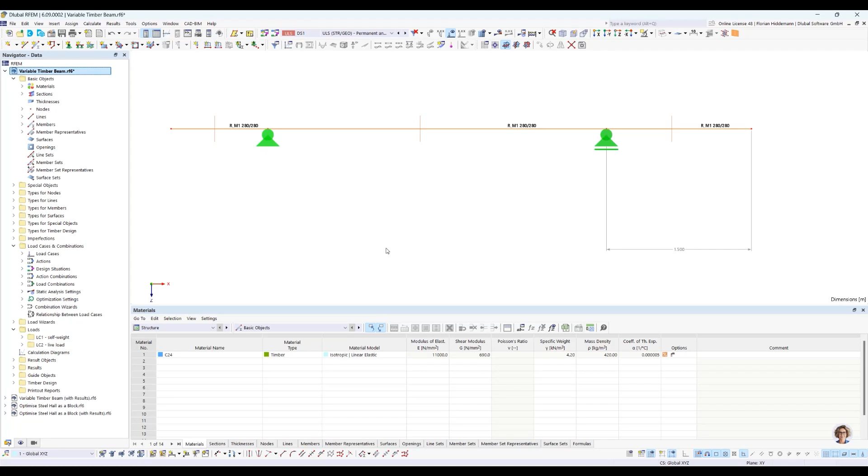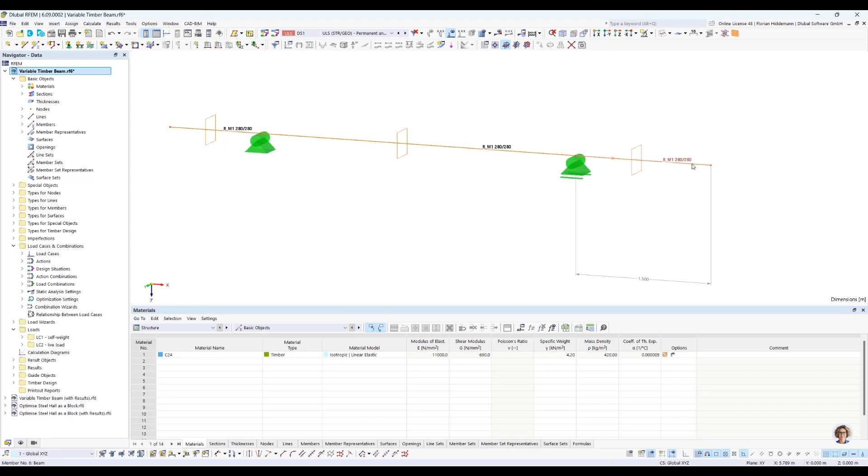And as you can see here, the first model is a variable timber beam. This one has nothing to do with blocks at the moment. It's just for demonstration purposes of the new features I just explained in the PowerPoint. So what do we see here? We have an easy static system. It's a single span member, and at the ends there are some members reaching out on the left and on the right side.

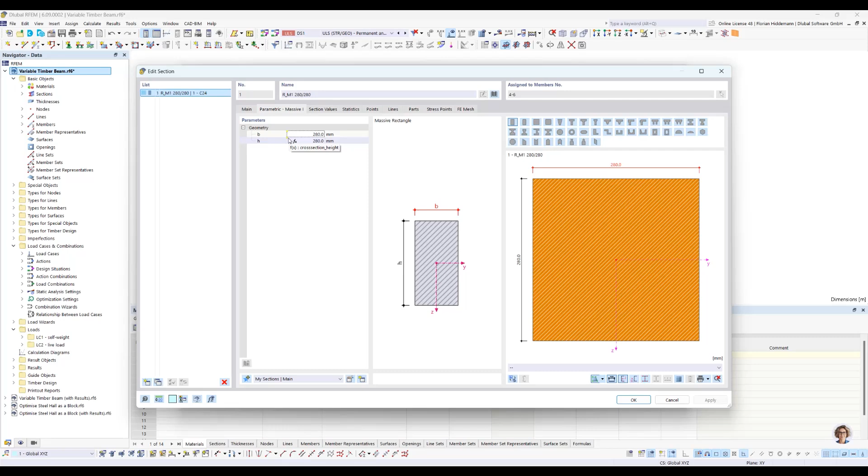It's a rectangular cross-section. And of course, when we are dealing with optimization, there are some global parameters in use. So we start here with a 280 by 280 cross-section with C24 timber material. And as you can see here, the cross-section width is given with a global parameter and the cross-section height also. In addition to that, the distance of the right support is also variable. I can show you now here the overview for the global parameters.

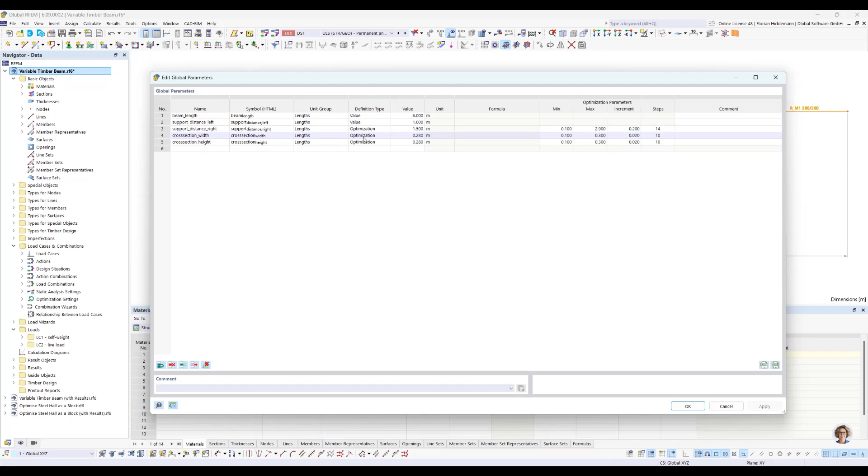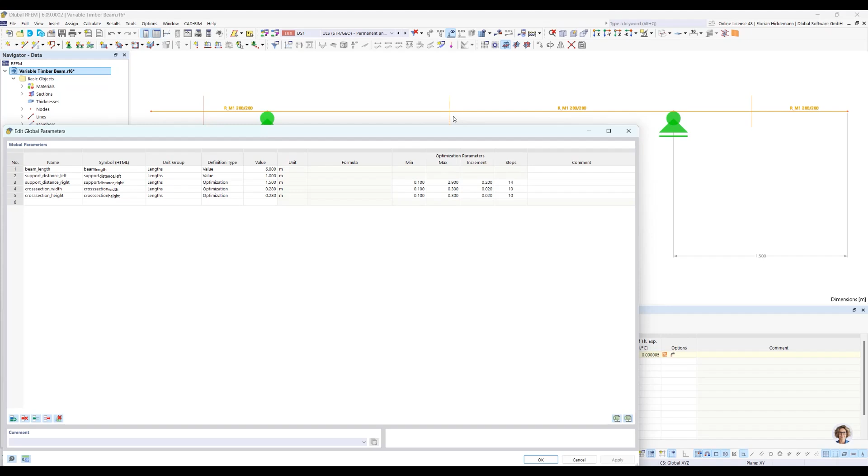The beam length is just a constant, which is easier for me to make the model. And the left support distance here is just a constant. And we would like, in this little example, to find optimal solutions for the right-hand support distance, which is now 1.5 meters, and for the cross-section width and height. This parameter here, the support distance, can be varied from 0.1 meter from the right side up to 2.9 meters, which is nearly in the middle of the beam.

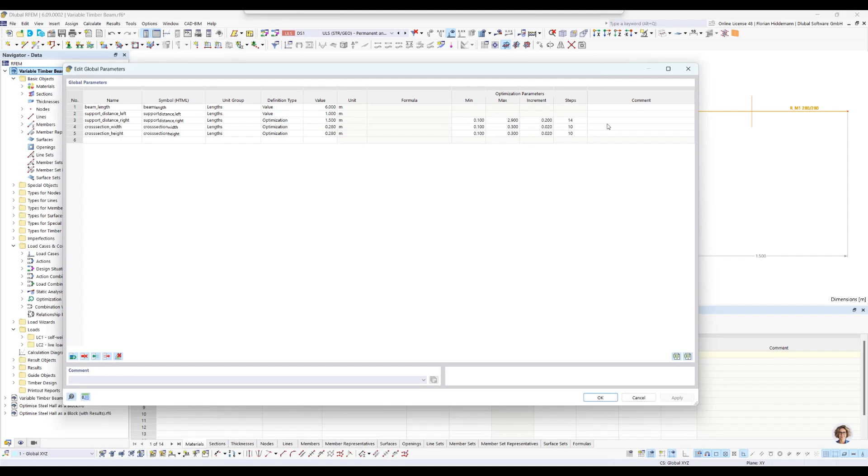The cross-section width and height go from 100 millimeters to 300, in steps of 20 millimeters. So you have 10 steps in between, and this is the variation this cross-section can take into account. So let's have a look at the first feature: recognizing valid mutations in the result list. For this reason, I activated also the Timber Design add-on. As you can see, Timber Design is activated.

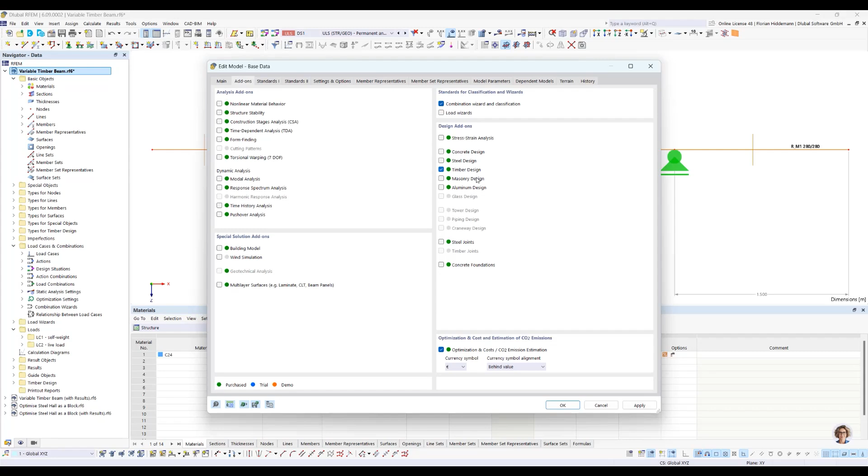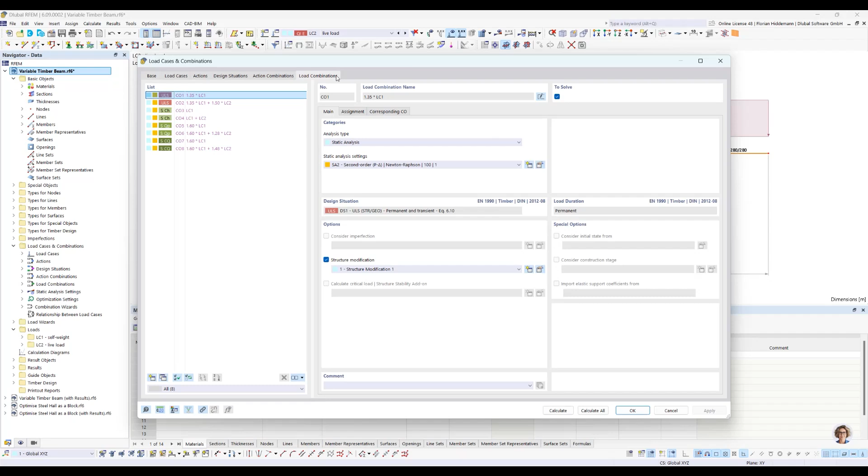And I just made, for demonstration purposes, easy loads. You see load case 1 with some self-weight, and there's another load case with a live load. We use here the German National Annex, of course, and a combination with it. So you can see design actions. It's all standard, which you are maybe used to already, that we do some combinations and design situations for you. So you don't have to worry about all the timber design specialties.

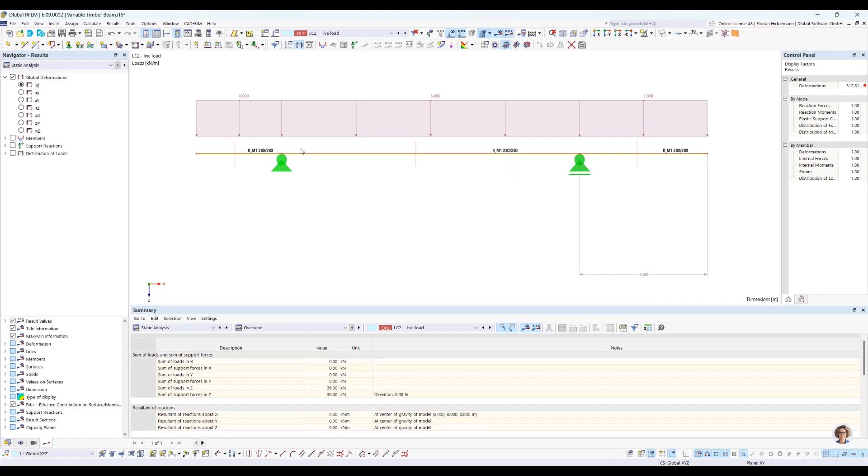So let's calculate the system in the first place to see what we are talking about here. So now it's a standard calculation without optimization. You can see in each run later on, all these calculations are performed for each mutation. And as we can see in the governing results of the design add-on, everything in this configuration looks fine.

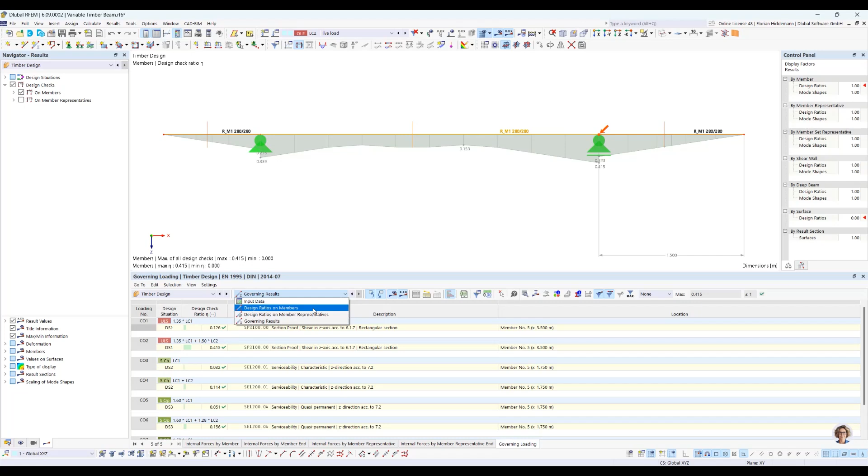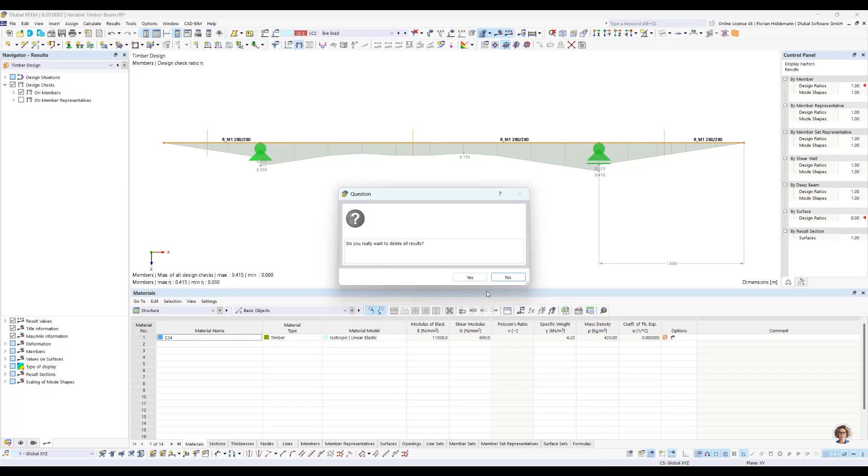But we are here to find out if there is an even better configuration or not, and to play around with our optimization feature to see what is happening there. So let's delete these results and jump into the optimization settings. You can find it here under Calculate if the optimization add-on is activated.

So you can store different optimization settings. It's not necessarily one you have to fiddle around with. You can copy it, modify it, and use them for different purposes. This is quite handy because there are a lot of settings you can do, and so you can remember each different optimization run later on.

So what do we do now in the first place? This feature I show you later on. This is the multi-stage mode, the multi-stage calculation. And even with this very simple system here, all mutations would have a total number of 1,815 optimization mutations. This is a lot if you consider that this is a very easy and simple system here.

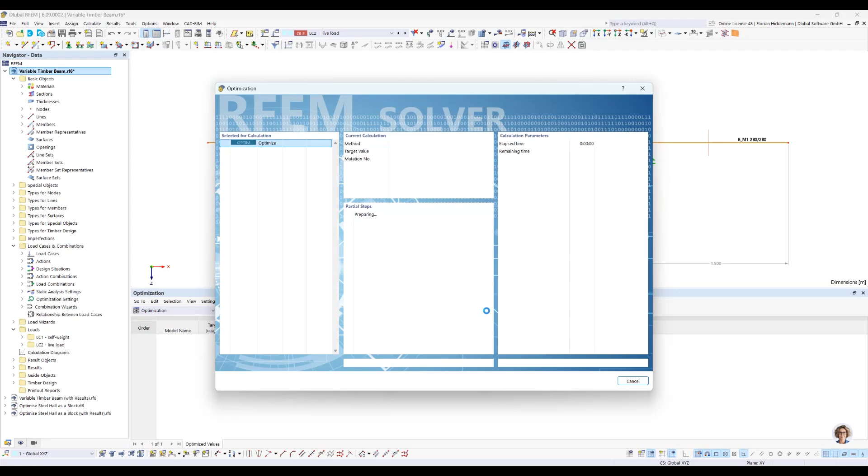So as you can see in the background, the first iterations are calculated. Each one of these mutations is also calculated within the Timber Design add-on. And for this reason, you see model number 1, calculated with these parameters, didn't fulfill the design checks. Model number 2, like in our first example, fulfilled it.

So with this algorithm here, it's just a random mutation. There is no clear strategy for finding the optimal target value. The program at the moment is just giving random examples for these 3 values or parameters and collects all the results. So with this nice feature here, we can see easily which calculation fulfilled design checks and which not.

And now if I cancel this calculation run here, today I will be mean to this model and cancel it anyway. So what you can see here, the calculations performed up to this point are stored. We have now 8 results. And as you can see here, the green check mark means, it's very important to see it again,

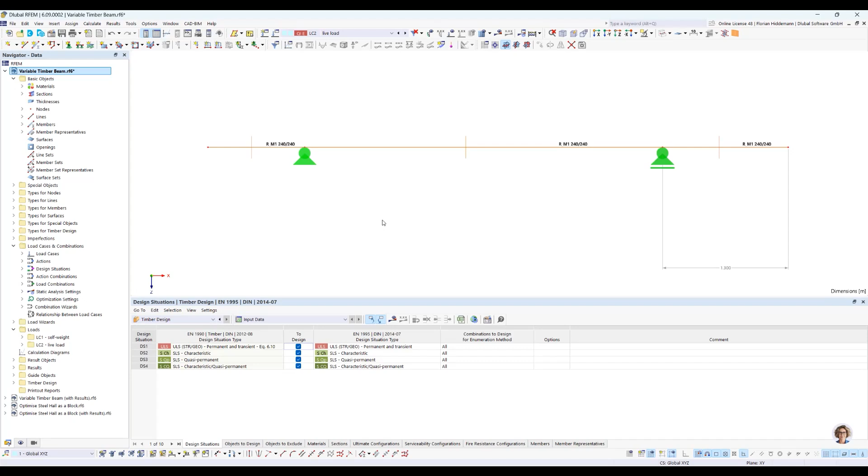this model is now active, and because I canceled the calculation run, the add-on doesn't calculate the last cycle. So if you jump into a new model in the list, you have to calculate the model itself. We store only the results you can see here in the list. Obviously, we don't store every full result which is calculated for each model.

If you have a bigger model, that would be hundreds or thousands of results. But we collect the target value and everything you need to display this result table here. From this point, you can then regenerate your model because the add-on varies the parameters as they are stored here, the way the model mutation shows it.

So for this model number 7, I calculated it now, and here's a green check mark. And as you can see, this means that every design verification here, design check, is fulfilled. So let's see model number 1, for example. I change it here, perform a calculation to see what was going on, why there is a red exclamation mark.

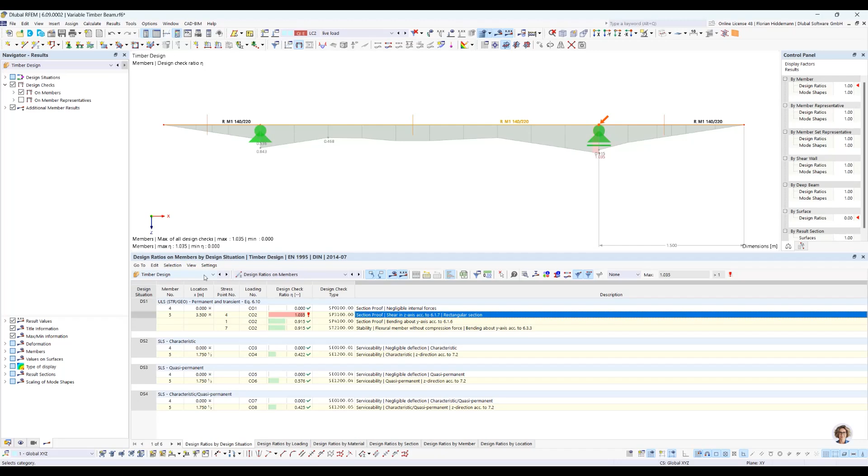And as you can see, close, but it counts. The section proof here at this point on the left side is not fulfilled. So this is the way this list is working with these indicators here.

The next feature: the results list remains consistent. It's easy to show now because I canceled the first calculation run, and maybe at a later point, for example now, we would like to go for a new optimization run. So all I do now is say, okay, try to optimize it with a particle swarm, calculate 2% of the possible optimizations. As every time, I make the optimization cycle here active. This is kind of a safety feature so that you are really aware you perform an optimization run and don't do it accidentally if you calculate all.

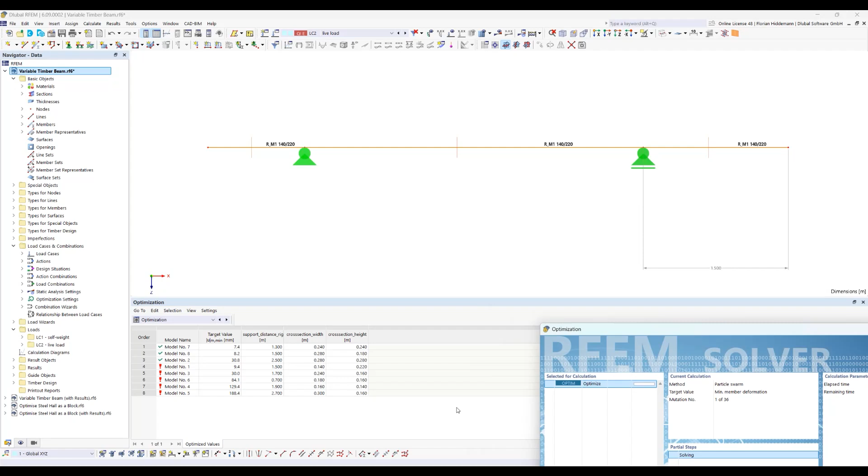Okay, so what will happen next? Let's see. You can see the results list here is stored. There is no new list, and this is a small feature, but very useful if you already spent some time with your model and calculated it, because now the optimization add-on checks each new mutation. Before it calculates it, it looks up the result table and sees if this mutation was already calculated upfront. If this is the case, we jump automatically to the next mutation without calculating it.

And if the model mutation is a new one, which is not stored in the list, the add-on just calculates it and adds it, like you can see here in the background. So as you can see here, now it's more straightforward because the particle swarm is a solving algorithm which tries to vary these parameters with the target value in mind.

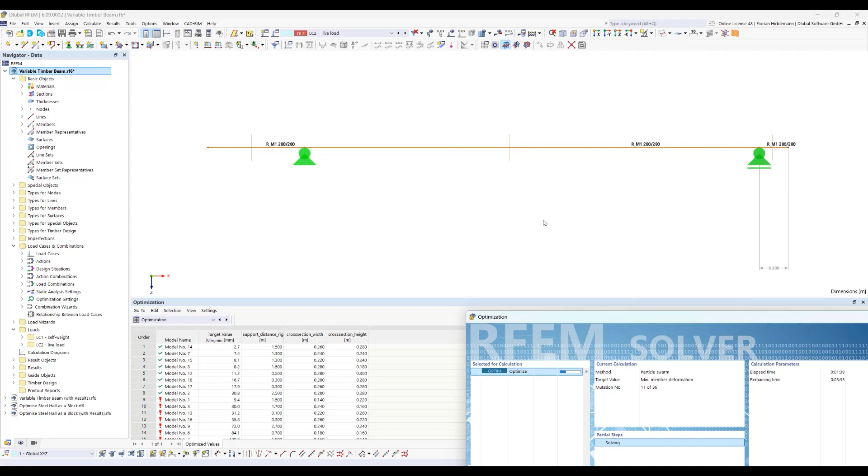And the more you calculate, the more it gets, let's say, a mathematical feeling for which parameter needs to be adjusted in what way to achieve the best target value, which is at the moment the minimum member deflection at every point. So the 2.7 millimeters, let's have a look into the program and cancel it again.

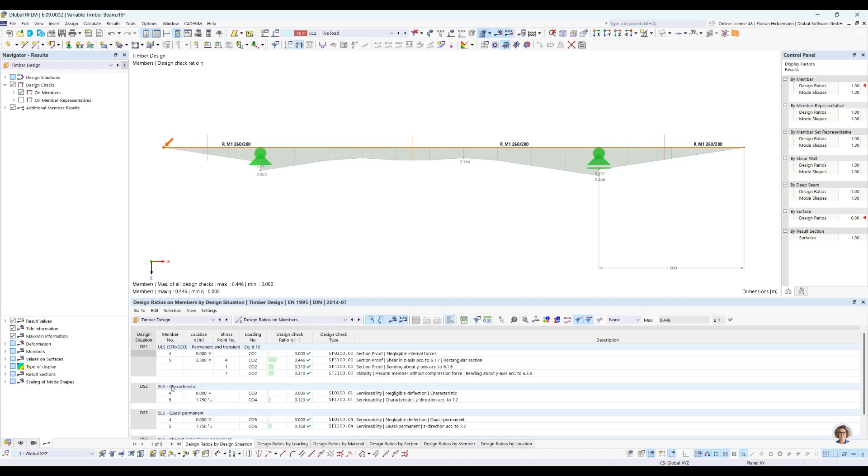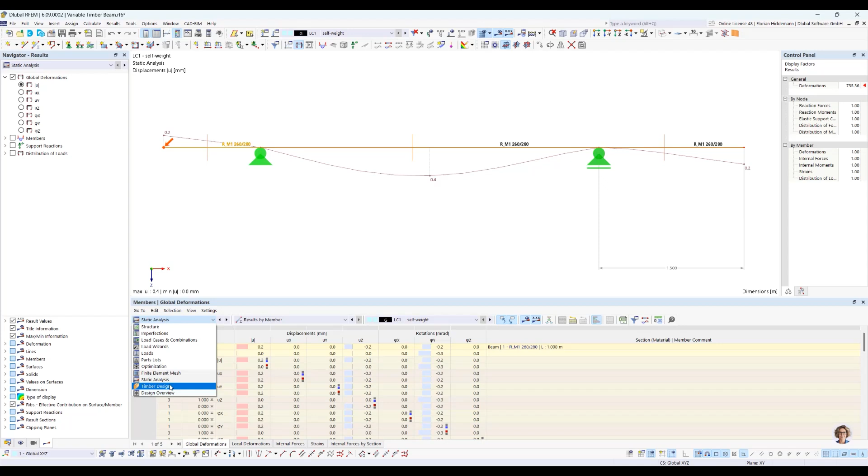Because we aborted the calculation, I need to perform a manual calculation of the system here. So let's see. Every design check is fulfilled. And for the target value, it should be there. I go to another model. Okay, yeah, I found it.

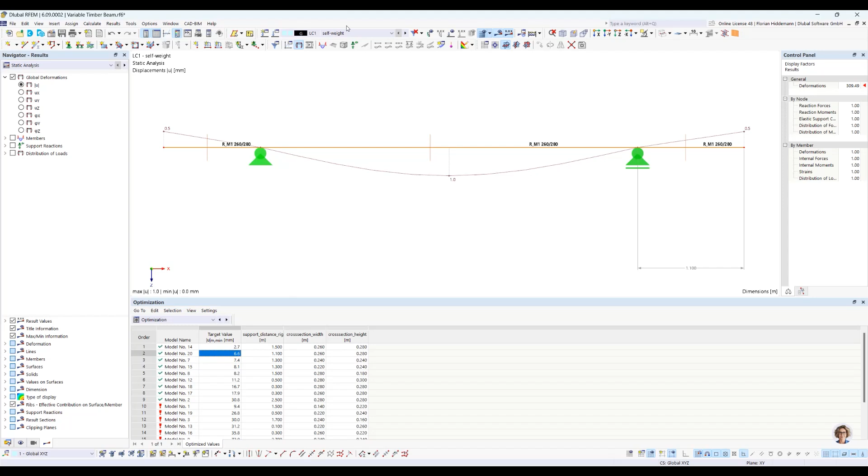Okay, we are looking for 6.6, and this is considered overall design situations. You set it up so if I go to the maximum load here in design situation 1, the ultimate limit state, here you can find it's this part here in the members, 6.6, and this is considered as a target value. It is looking for a global minimum to minimize the maximum member deflection at any given point. I give you some time to let it sink in.

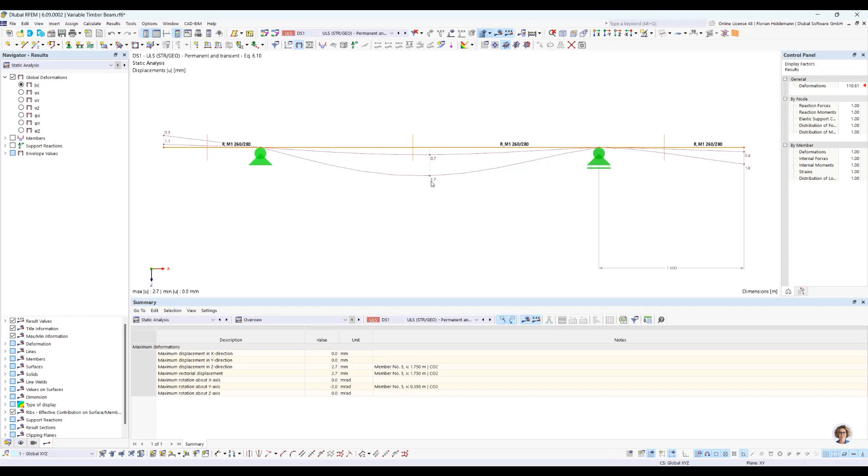And now we are able to find out the 2.7 millimeters. Just to be sure what is going on here in the background. You can see the 2.7 at this point. So this is a small introduction example for working with the list here and the ability that it stores every optimization run. Let's go to the next topic, the sensitivity factors. What is going on with that?

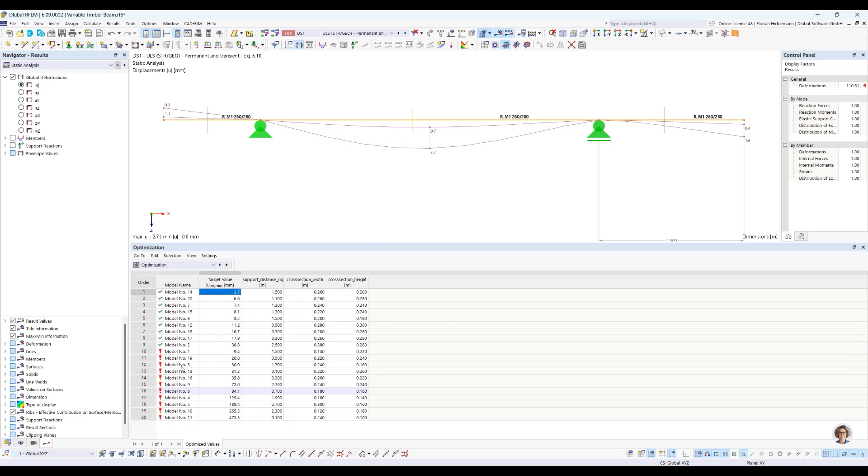In the model now, we have 20 model mutations calculated. And now here in the table of the parameters to optimize, you can see some sensitivity factors. They are now estimated from the model results list here. So we can now perform an analysis of how the target value is influenced by varying different parameters. This estimation gets more accurate the more models you calculate.

And with this small amount of 20 models, you can see the cross-section height has a big impact on the desired member deformation, a much bigger impact than, for example, the cross-section width. If you're familiar with how the stiffness in such a system works, that's absolutely plausible, because the height of a cross-section goes with the third order, and the width goes with the first order into the stiffness of this beam. So it's a very plausible result.

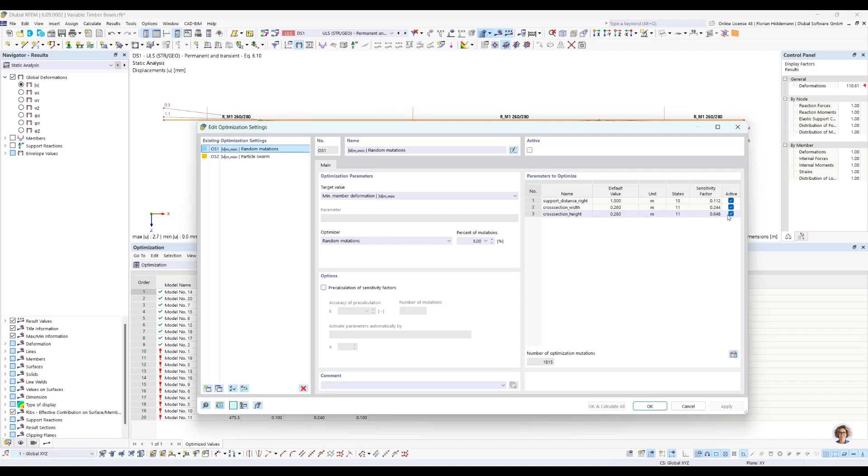And these two parameters here have much more influence than the support distance. That's something you can already see in this little model. Here it's easy to have an overview by yourself, but think of more complex situations where you vary different parameters and you don't have a feeling what would happen if you vary different combinations. This is very nice to reduce the number of optimization mutations, because you can choose, for example, if these ones are so impactful, why should I vary and spend my calculation time with this one?

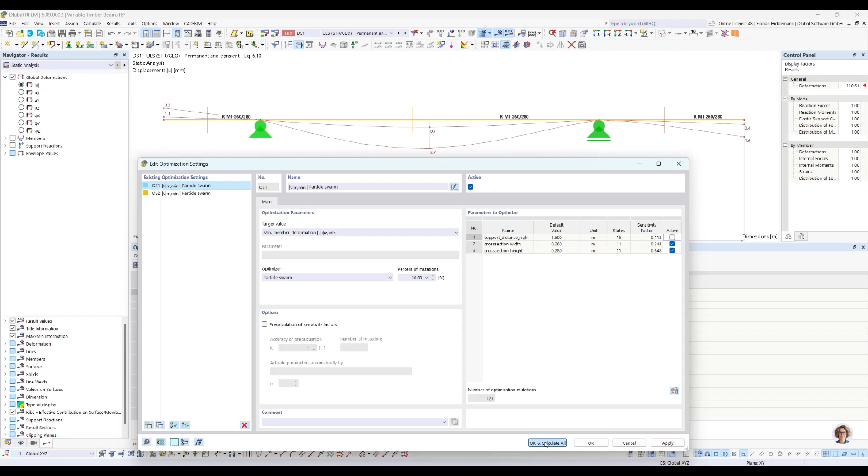And as you can see, it reduces the number of optimization mutations drastically, because now it's 11 by 11 and not by 15 anymore. So here we have 121 mutations. And this makes it much easier for the algorithm to find more potentially better mutations. So now, because I set only these two parameters as active in this dialog, the model is fixing the 1.5 meter support distance and just varying the second and third one.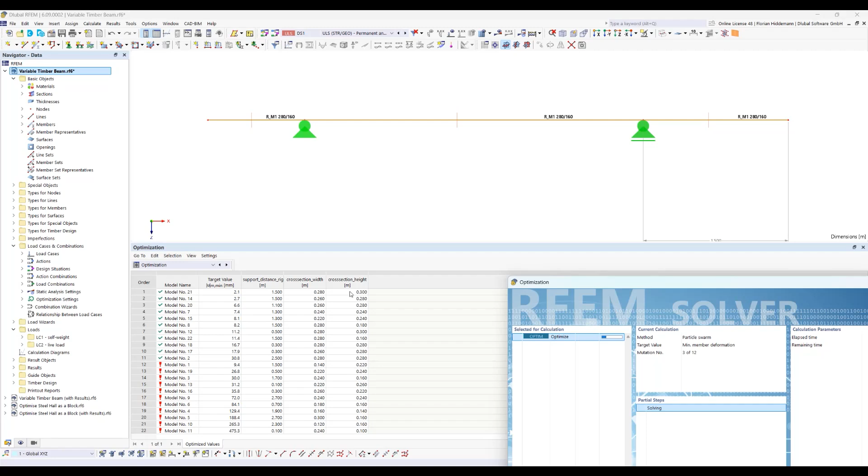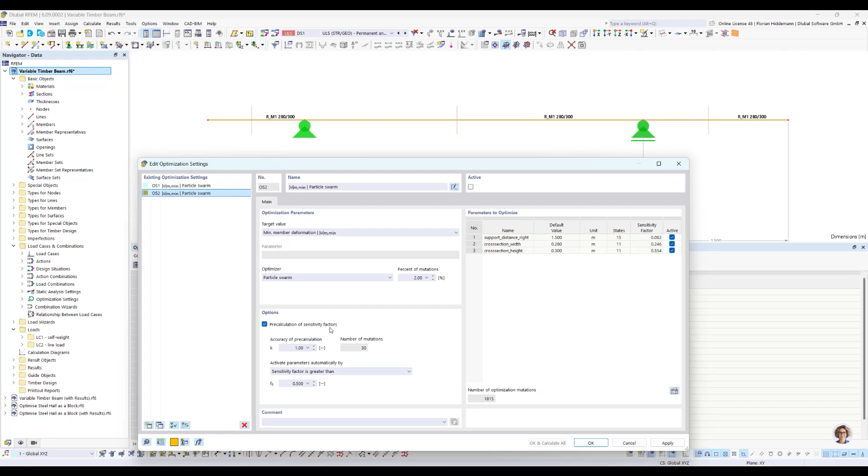Okay, this as a basic introduction, remembering our new features at this stage. I can show you the multi-stage calculation as well, and for this reason I would go back into the settings, choose other optimization settings here, and now we have a look into these options here: the pre-calculation of sensitivity factors. For this reason, I will empty this list by varying the model. This is something you need to do now, because the list is stored.

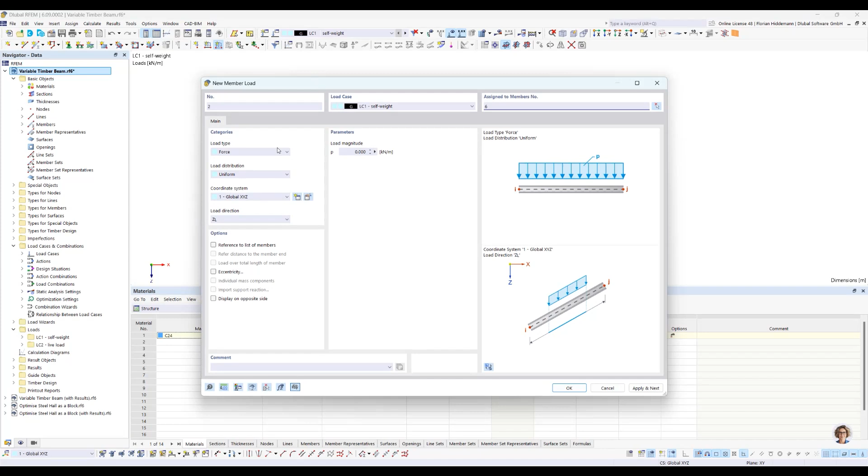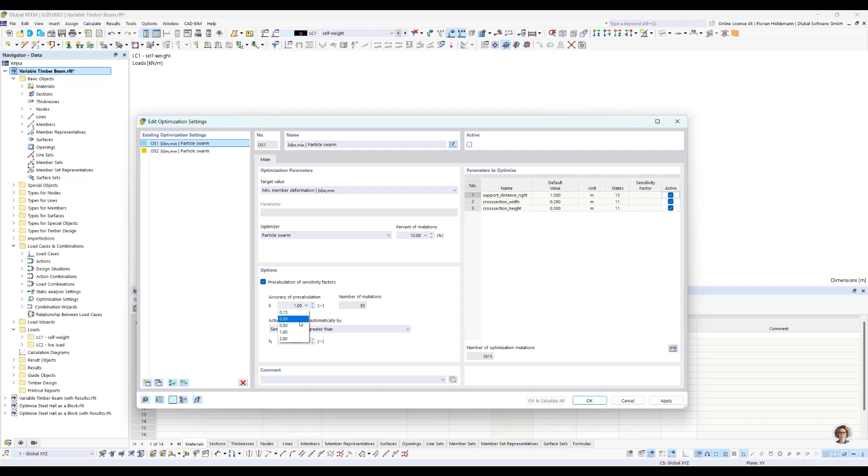What I do now is I delete a load here. And if you change the model in a drastic way like this, all the results are deleted. So be aware that this will have an impact on your optimization results. So now we can start with a clean structure here. And for the next run, I say, please make a pre-calculation of the sensitivity factors. And in this example, let me make only a small guess with, let's say, 5 mutations.

And after that, the program should automatically combine 2 parameters in each following optimization run with the highest sensitivity factors. So it's kind of a bit abstract and complicated, like most of the things with this add-on, but let's see what is behind it.

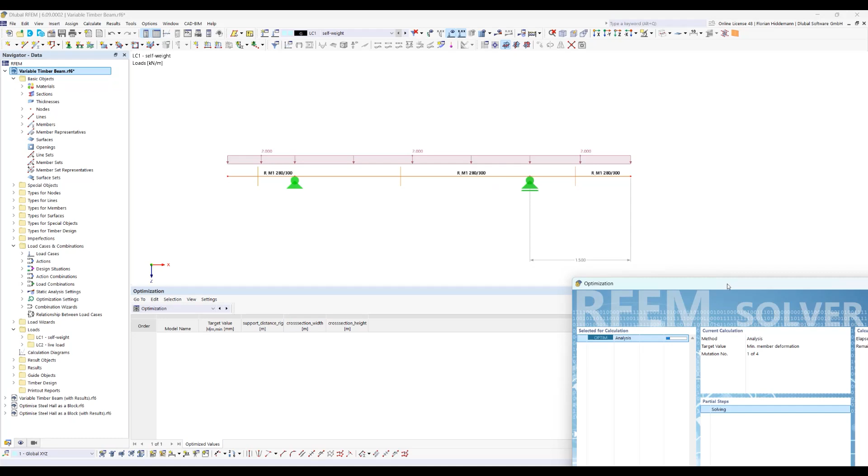So now we have a multi-stage calculation. In the first place, we are doing the analysis. So the model is now varying some parameters with a very small amount of models to guess the sensitivity factors. It's analyzing the results here and the estimated impact of these parameters to those result values. And as said before, the more mutations you calculate, the more accurate is this estimation.

And now it goes to a second step. It uses now the results from the analysis. And here it is now combining the two most influential parameters with a particle swarm that calculates 10% of these possible combinations. And the 10% is now only 16, and it's not 181. I'll show you it afterwards.

And you can see after this optimization run, there is another optimization run waiting. And in the next optimization run, the program goes further and says, okay, I have now combined the most influential with the second influential parameter. And just to check it in another run, I go through and perform a calculation with the second best parameter and with the third best, because you choose to combine two parameters at the same time. And this is the strategy the program is choosing to go through these combinations.

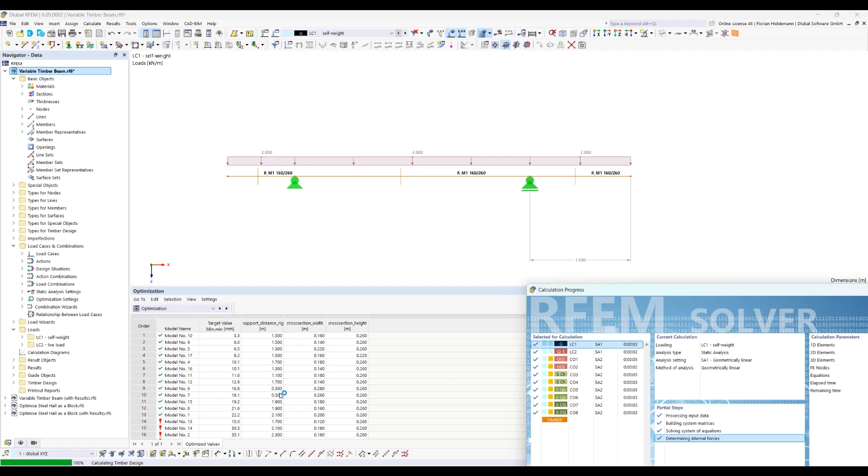As you can see, we have with only 17 calculations quite some optimized results. But with a small amount of calculations, the sensitivity factors are not guessed very properly. Here it's now a very big difference on these ones. And you can do it better by giving here more accuracy of the pre-calculation with, for example, 30 mutations.

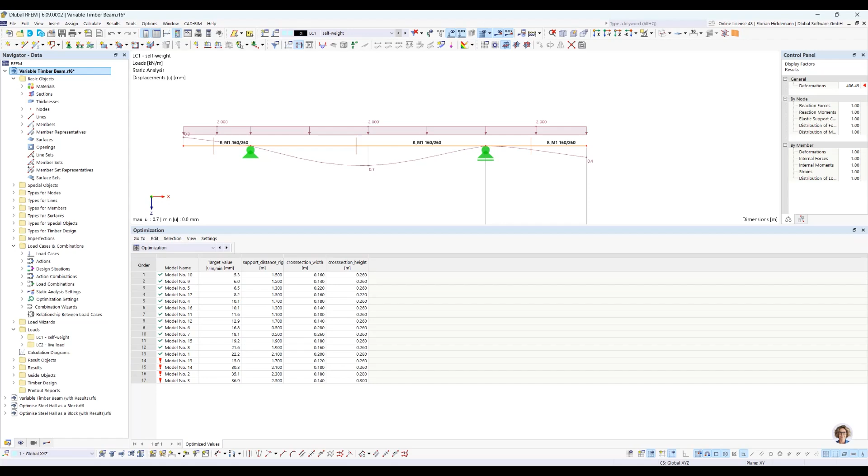So our recommendation here is to choose higher numbers if you feel the calculation is not so straightforward. But this for now, to demonstrate the possibility of our multi-stage calculation run. If you have already done more calculations, I switch to the same model here. And I did a pre-calculation. So we have here 217 calculated models.

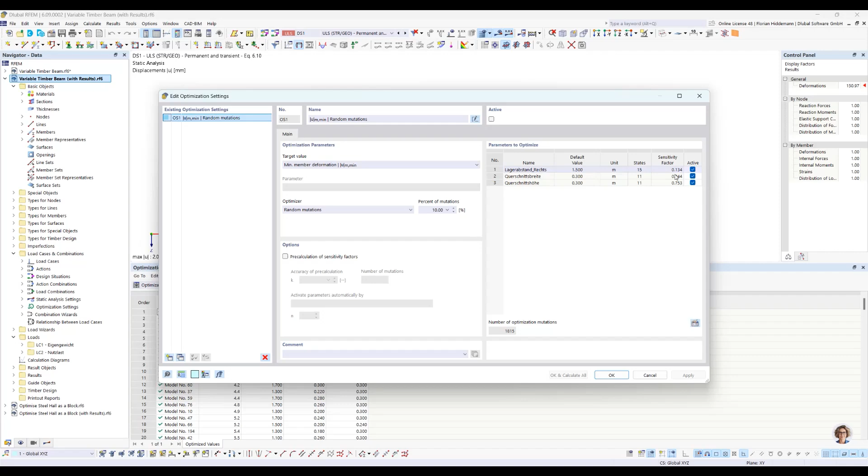As you can see, the sensitivity factors here are more accurate now because there is a big result list which is analyzed. And this is much more plausible from an engineering point of view. What is interesting now is that's also a nice feature. It's new because we have a consistent result list now. You can change the target value afterwards. So for now, we did the minimum member deformation at a specific point as a target value.

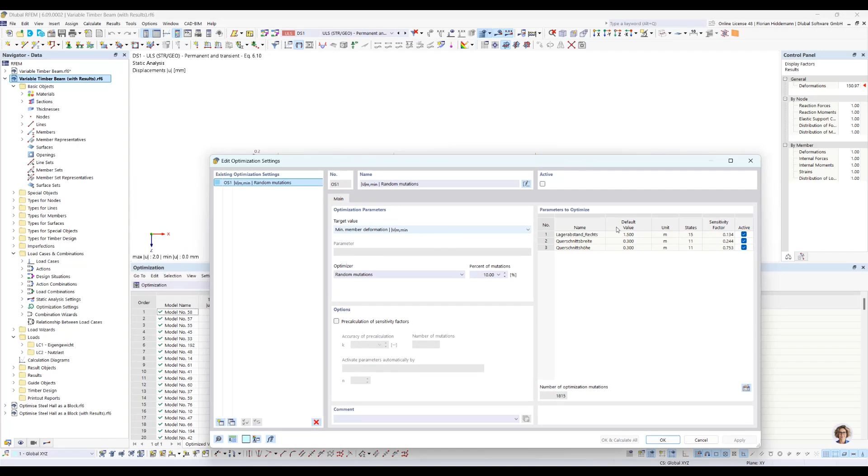So obviously, the height of the cross-section, the width of the cross-section, and the support distance. I'm sorry that these are German words here. If I had translated them, the results would be deleted because it's changing the model. So I'm sorry for that, but I hope you can go with me. This is the support distance on the right side, the width of the cross-section, and the height. And obviously, the support distance should have no impact on the weight of the model, but the height and the width should be more or less equal, right?

Let's check it. And we switch now to the minimum total weight. And as guessed, these sensitivity factors are now changing, because if you are varying the width and height, these influence the area of the cross-section in the same way. And guessed correctly, it's quite equal. And the supporting distance here from the right side has in reality absolutely no impact on the weight of the construction, because it's just a load bearing point.

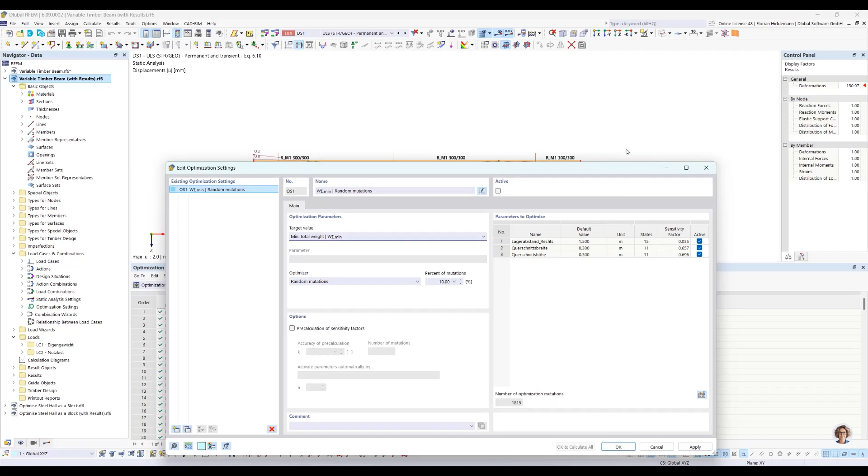What's interesting, the more you calculate, the more this value will go to 0, because it's an estimation based on the list here, and our algorithm is already seeing with this amount of results that the influence on the desired target value is very small. So this is quite nice to see what you need to vary in your model to achieve specific targets.

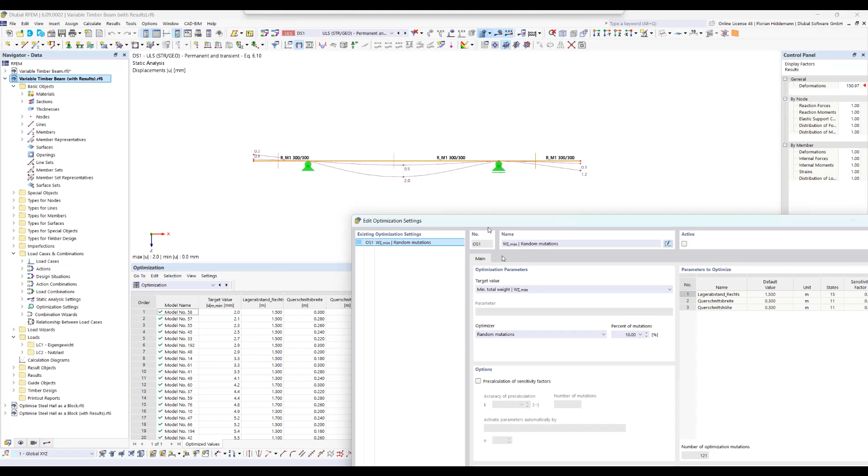You can see here in the list, if I change the optimization value and start a new run, so let's do it with a particle swarm. Just started. Let's see what happens. It's now changing. And this is also a strong feature. You can use all your existing calculations for this. So we have now

200 already existing calculations. Because we stored the target value in each previous optimization run, as well as the desired minimum deflection, if there are surfaces, the minimum surface deflection, and so on. So every available target value is stored with each mutation, even if you didn't activate it in the dialog. And this is very useful if you have different perspectives on your construction and you want to try out which one is the best for the minimum total weight and which one is the best for the minimum deflection.

It's the first step into going to multi-target optimization runs. Behind the scenes, we are already thinking about those features, but it's a small step, a step-by-step way of going to these goals.

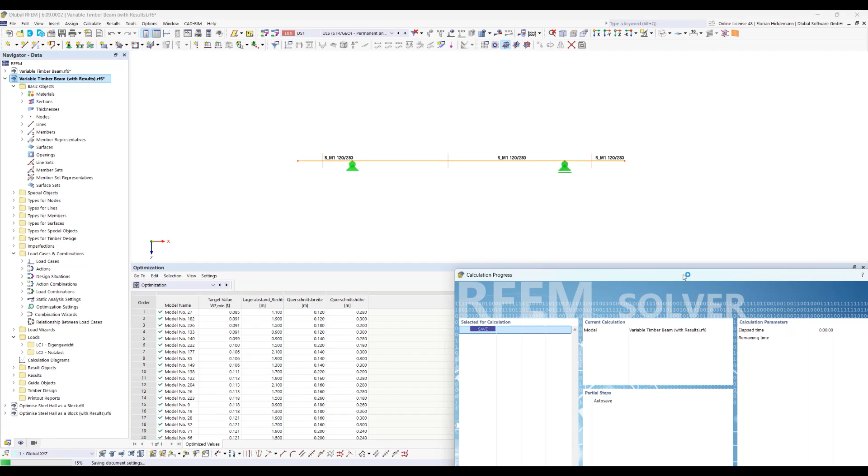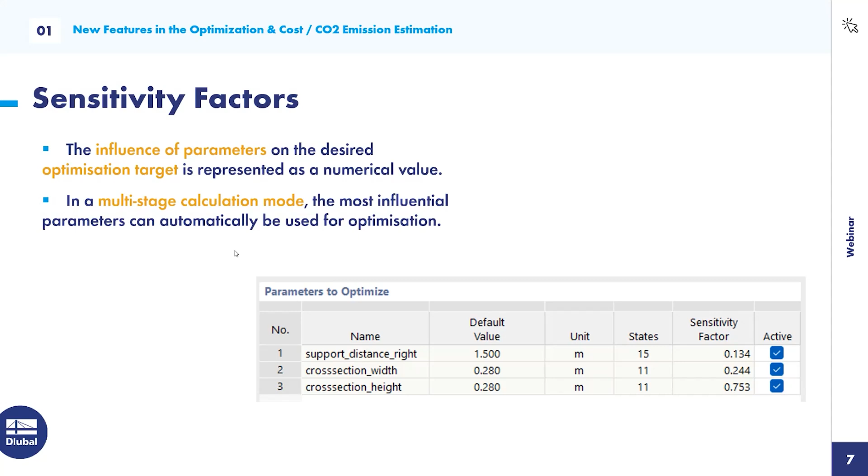Okay, so now you saw everything. We can change the optimization targets. We store it across different optimization runs. We have a multi-stage calculation mode, and maybe you are already waiting for the title-giving feature of this webinar, the optimizing blocks.

This is just an inspiration because maybe you found out in the past, if you are working with global parameters, there are some restrictions, because global parameters are very, very useful to play around with the geometry of your model. And you can use it in so many input fields that are quite helpful to steer your model and create the geometric system you would like to have, and also add static values, resistance values in many different ways.

But maybe you experienced also some restrictions when it comes to demanding construction rules. If you have a more complex statical system or construction you want to try out, you can use a block, because blocks are perfectly fitted to generate your model with your own specified rules, algorithm, programmable. With a block, you can build your own configurator. And this configurator itself takes input values.

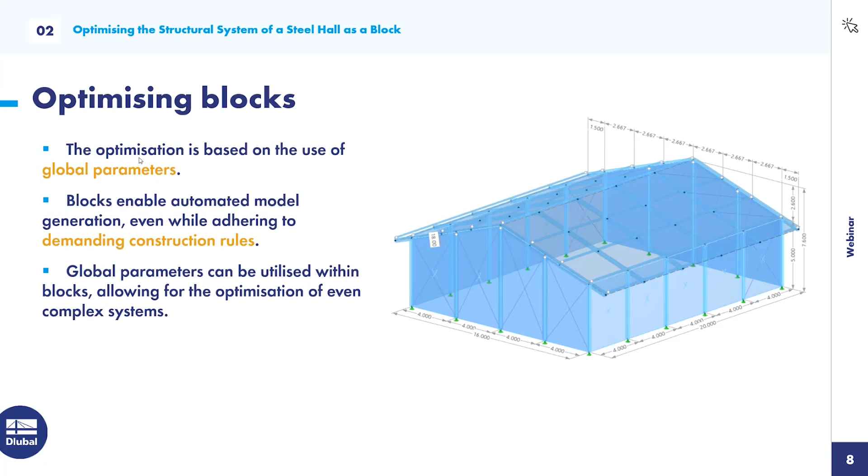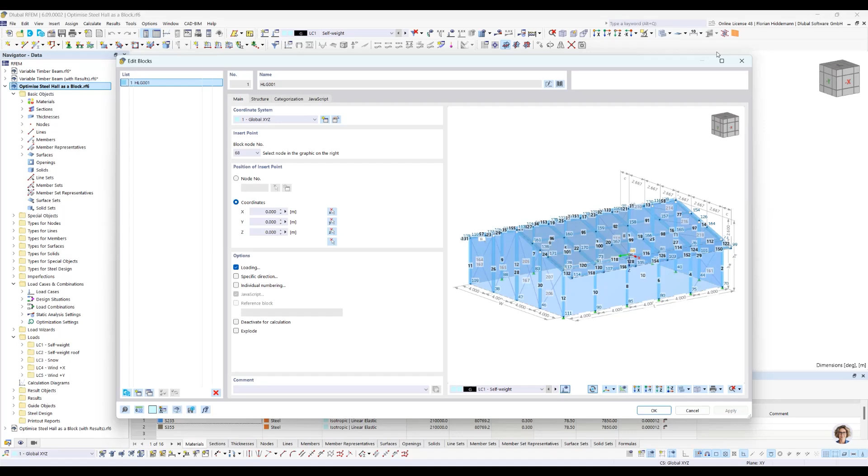So I've done some pre-work here because this needs some time to set up. And so I would like to present what I did here and show you what is special about this model. So in this model here, as you can see, this is everything. It's a block. In the webinar next week, you can see, if not already known, how to edit it, how to import it from the Dlubal Center. Here for the moment, let's just stick with the idea.

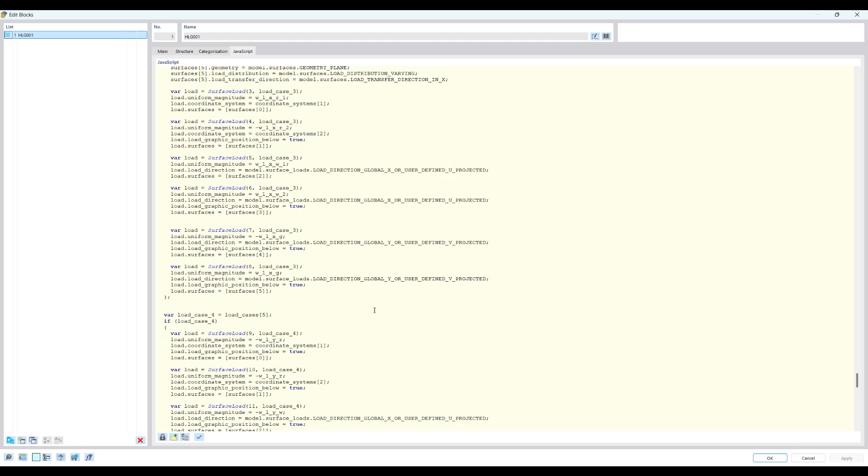A block is a programmable object where you can define in JavaScript what is generated, what is steered. It's using internal features of our programmable API. And what you can see here is JavaScript used as the language for this. So as you can see here, the whole steel hall is defined with these functions and API calls.

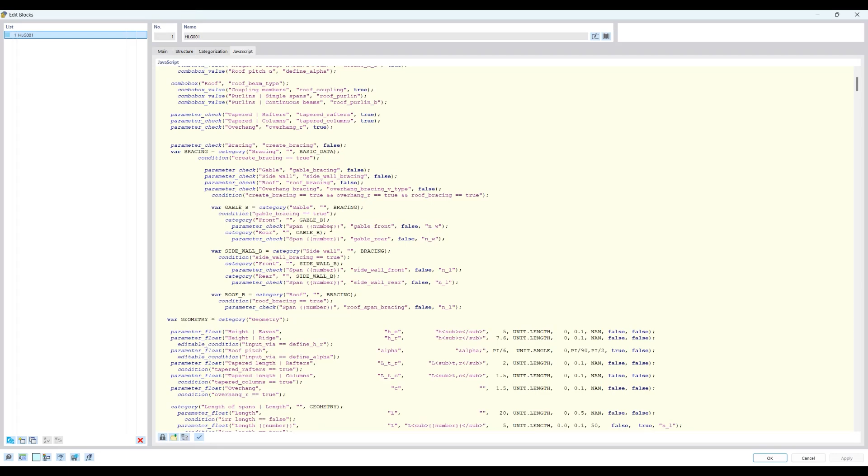Based on the structure here, you also define a parameter structure, and depending on what you are programming for the block, you now have your own input fields you use in your program. And this enables you to work with more complex structures. For example, this block is programmed in a way that a bracing is automatically activated here. You can see it here.

If I uncheck a checkbox, the bracing is updated. Yeah, it generates a totally new model in the background. The numbering is different. Everything is different. So keep in mind that you can play around with this; the only borders are your fantasy and your abilities to work with JavaScript, obviously. But you can really do some fancy stuff with it.

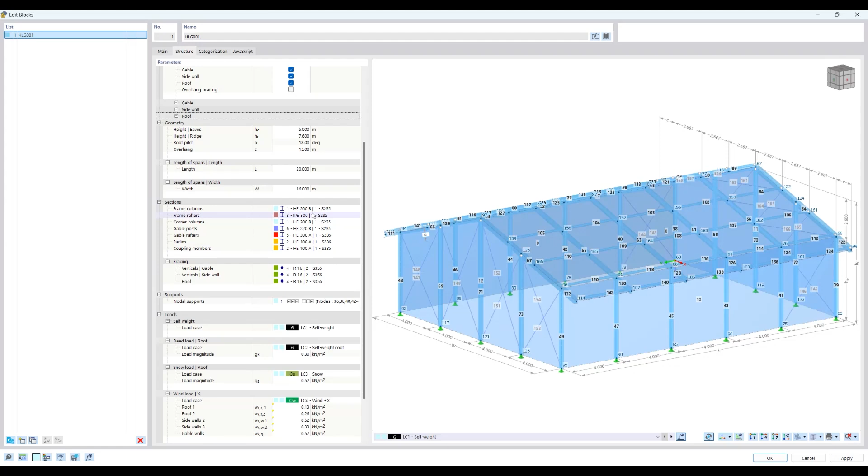I set it up here, the input fields, to connect it with the materials, cross-sections, and everything which is in my model. And just here for the, let's say, pre-calculation as an example, I added some easy and, yeah, it's leaning into a realistic load case scenario, but we are not rebuilding here our wind load generator or snow load generator. This is just for a demonstration purpose and to give you an idea what is possible with blocks.

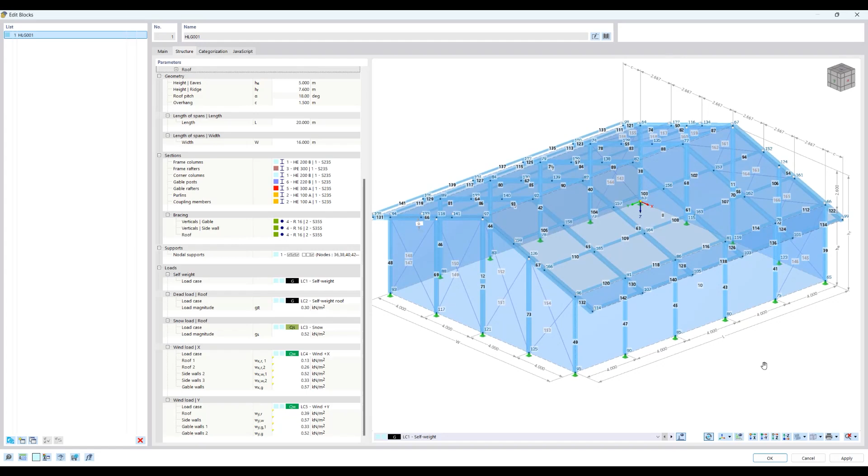And if you have an engineering problem which is worth spending some time with, which you are doing with a lot of repetitions, or you need to optimize it and there is something you would like to dive more into, have in mind that you can program a block and then connect it with a global parameter. That's a trick for today here.

I can just edit, for example, the number of spans in the width. So let's change this to 6. And we will see that here in the gable walls, the members and the bracing have changed completely. The whole structure of the steel hall is now different. I go back and change it to 4.

So what I've done here is you can just use a global parameter in this input field. And as global parameters here, I have defined the span counts in the length direction and the span counts in the roof. Yes, and those values are defined as an optimization type. So this is a trick for today. We will optimize and play around with the span count, length, and roof, and vary them from 3 to 8 and 5 to 12.

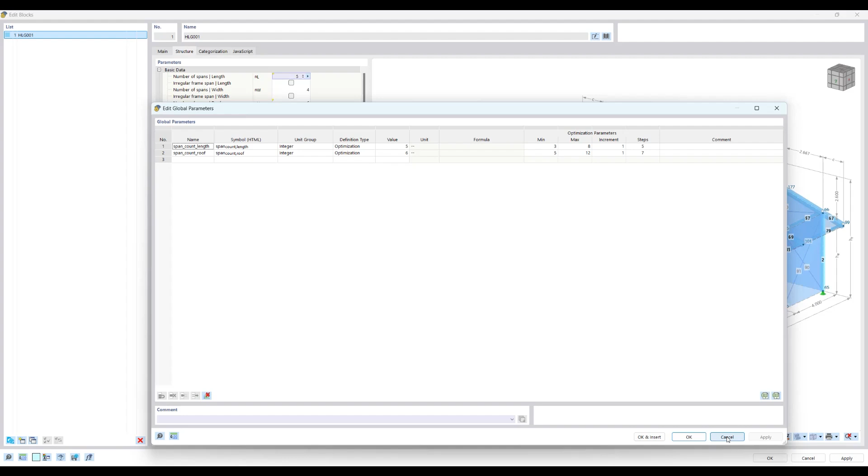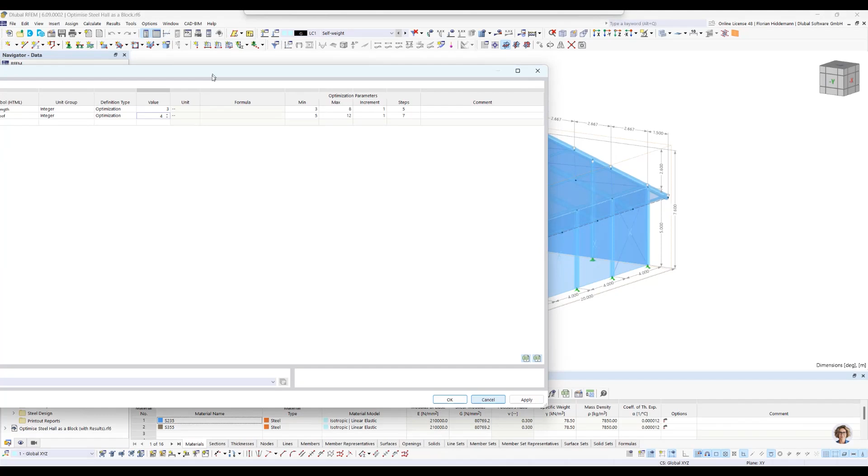It's 5 by 7 steel halls you create then in the background, and I will show you what is happening then if you use it in this way. So let's just go back here. Now, as explained, you can see in the construction what is happening. If I change this to 3 and this one maybe to 4, it's reconstructed.

And this is, I think, a magic way to define even systems with different statical conditions, everything that can use a number, a Boolean variable, whatever you can use later on in a block, and design complicated algorithm-based construction rules. And together with the power of the optimization tool, you play around with this block to achieve a global state of optimal target value.

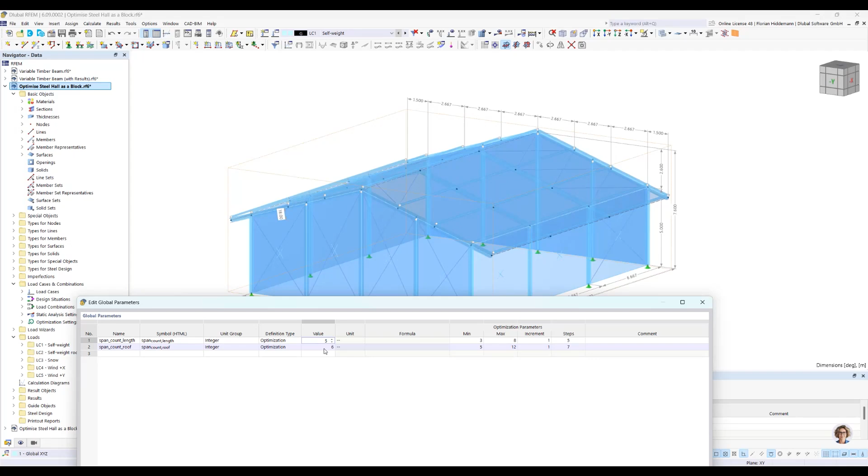So let's go back and start with maybe 5 and 6. So I press apply and you see it's a totally new construction. Oops, I disconnected my table here.

This looks interesting, maybe, and I don't want only to consider different field spans, because if I choose fewer fields, I need stronger cross sections. And otherwise, if I have more fields, I would expect that my cross sections for the columns and the purlins here or the coupling members have to be much smaller. So don't forget, you can use our optimization add-on in combination with cross sections.

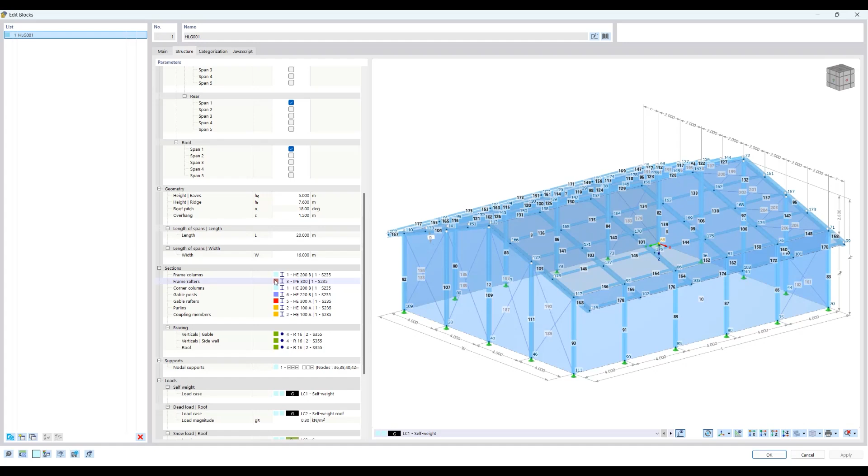So let's say I want to use these cross sections in my block, and again everything is generated and defined by one block you can see here. I connected these cross sections here to the code in the JavaScript. And now I can go to RFEM and say, please optimize this cross section I used. You only have to click here, and this enables the optimization feature for this member.

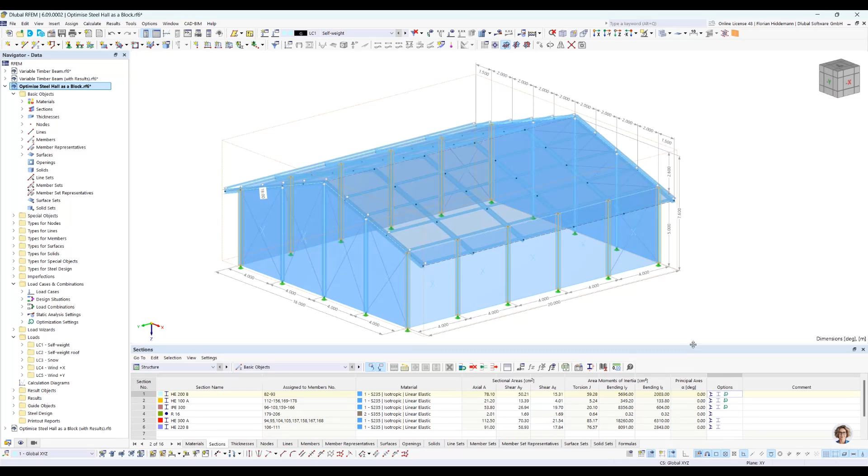Let's jump in the optimization settings. Here you can see, let's try it out. If you combine only the states for the length and roof, you have 48 steel halls, because it's taking also the minimum value and the maximum and the steps in between into account as a state. And if you multiply it with all possible variations of the cross sections, you get almost 500,000 possible steel halls.

And who of you would like to calculate them all by hand? For me, at least, it would be painful.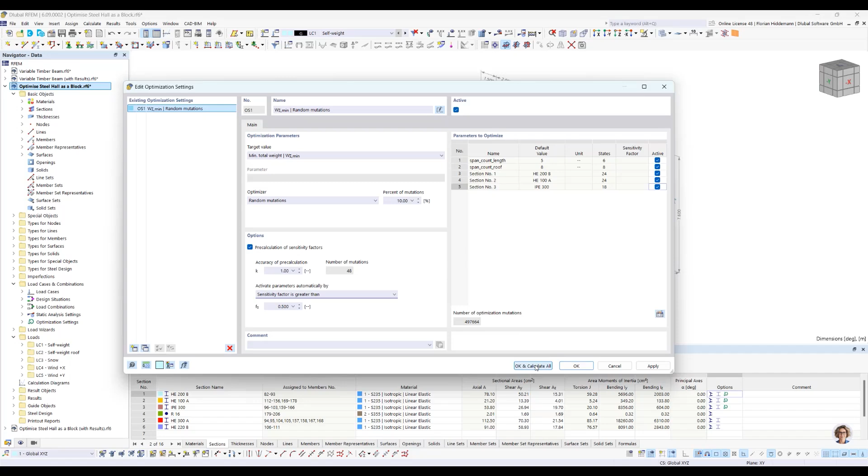So I rely on the multi-stage optimization run, and want to see if there is some construction winning the game for a minimum total weight. I want to have calculated in the later run only sensitivity factors which are greater than 0.5, and in the first run pre-calculated with 48 mutations. So let's just test it. Now, I'm totally aware that this is not the end of the story.

If you have a system which is quite optimal in this way, and you have done many steel halls or comparable projects in the past, of course, you have to work in a more detailed and specific way later on. But it gives an idea what is possible if you program complex structures, because you can define almost everything which a design add-on is also needing in the background to evaluate this whole.

And remembering our little green and red indicators here in the resulting list, the green arrow means that the first steel hall here, it's obviously heavy, but yeah, it's a first random mutation. This one is fulfilling all activated design verifications from the steel design add-on.

So imagine you have a very complex structure with different blocks. You can put a steel hall as a block into it. You can put a small next building as a block next to it. You can adapt here some staircases as blocks. There are a lot of possibilities, and steer them all by global parameters, and then vary some calculations to get an idea, let's say in the first stage of your engineering progress, to try out different designs and find out what is going for a most efficient design.

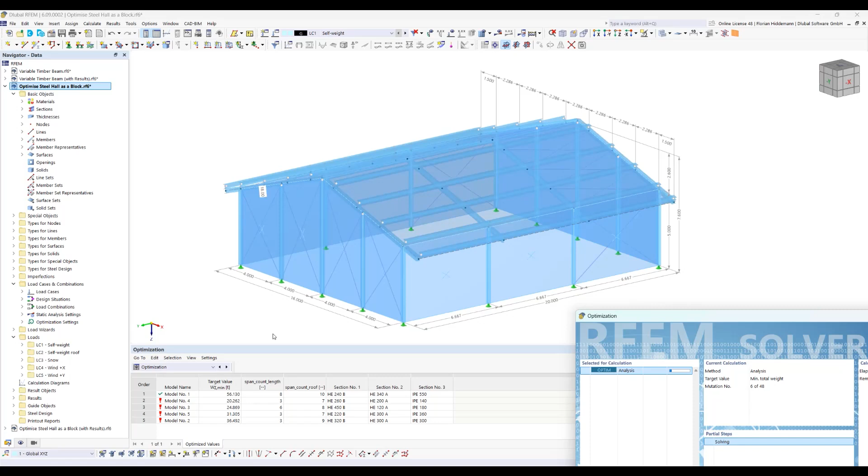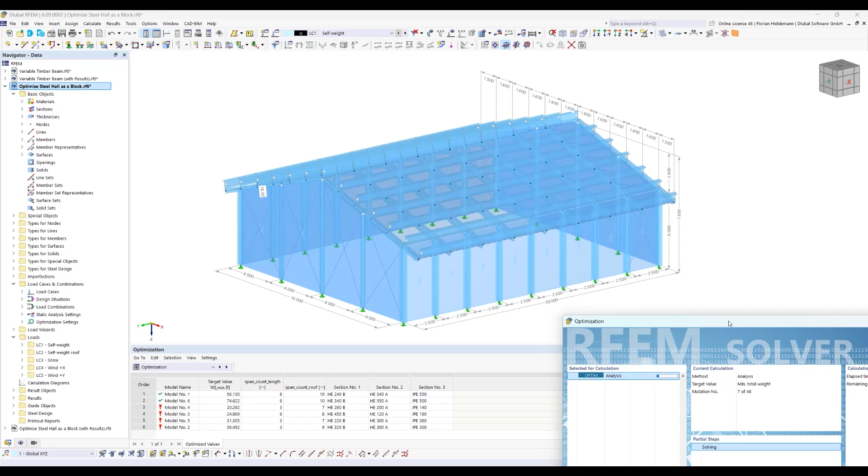So yeah, this is happening here. And after the analysis would be done, the algorithm would then choose every sensitivity factor over 0.5 and combine it later on. It will do after this optimization run some other stages, but for the moment, please have in mind the new feature is multi-stage. It's faster than only a single one with 500,000 possible combinations, because it is more target orientated, considering the most influential parameters and only combining them in different multi-staged calculations.

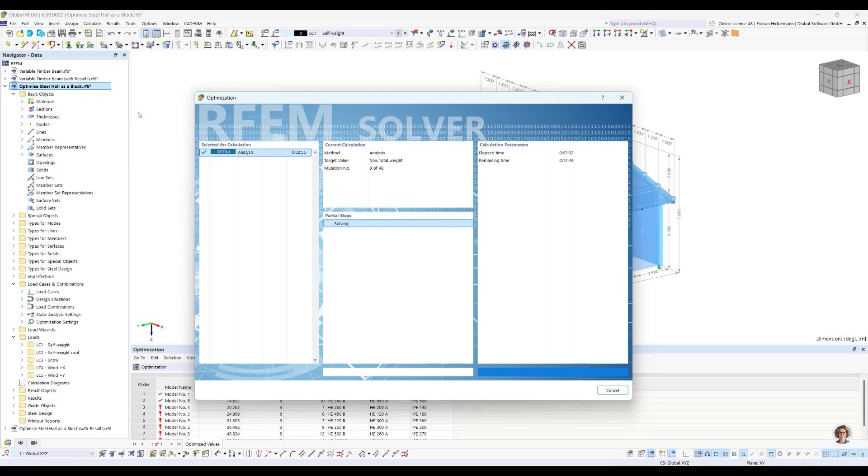So in the end here, let's have a final look into the results I calculated with the steel hall in 3 to 4 hours here on my laptop to see what is possible. In preparation of this webinar, I calculated this model here as well. We have 840 calculations. I think it took around 3 or 4 hours here with the laptop. And as you can see, it's a very big variation of valid and non-valid models.

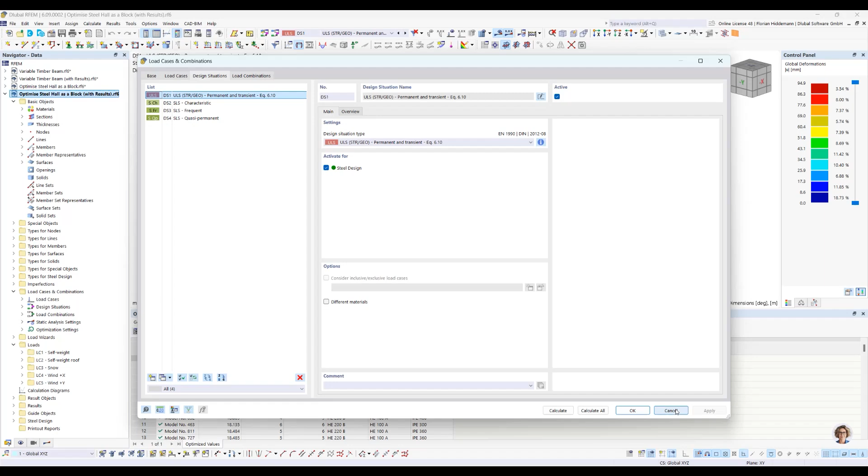And the worst valid model is 100 tons with obviously a lot of fields and HEB 1000, some big profiles. It's safe to be in it, and maybe a bit heavy, but also you can go down to 16 or 17 tons for a 20 by 16 meter steel hall. And yes, I have to say, in this optimization run I have only considered some ultimate limit states. I deactivated for time purposes the other design situations, but if you let it calculate overnight, you can activate everything you need for a real life calculation you are using with RFEM every day. It's just more time consuming.

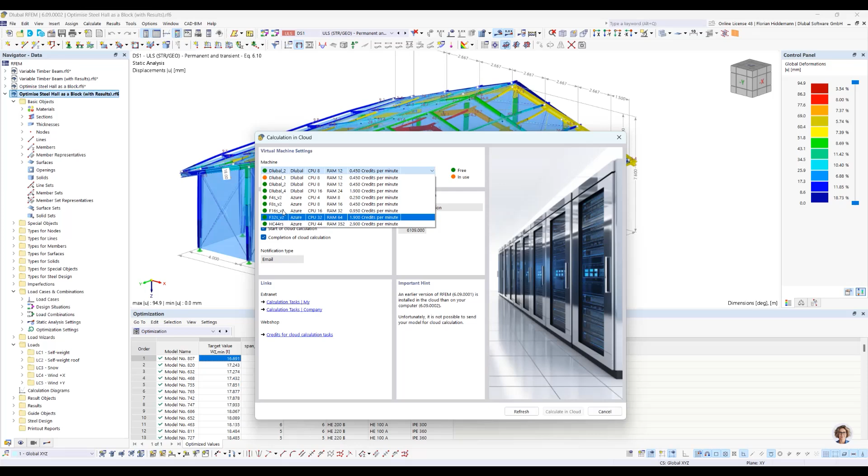But if you don't want to spend time on your local machine, remember you also have the possibility to calculate in the cloud. Next week, there's a nice webinar: cloud calculation and blocks. So you can also go to the cloud, and you have then these machines here available. You can put your system into the cloud calculation, let it calculate, get the results after that. And it's then maybe a better inspiration how to adapt improvements on your model with this technology.

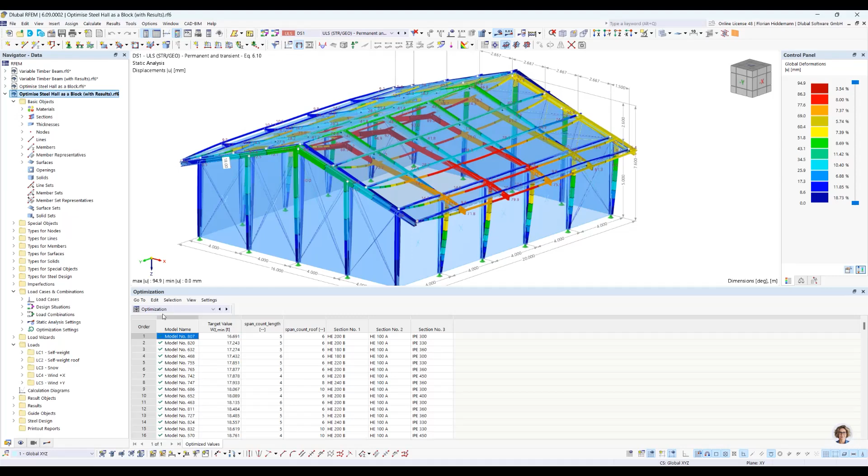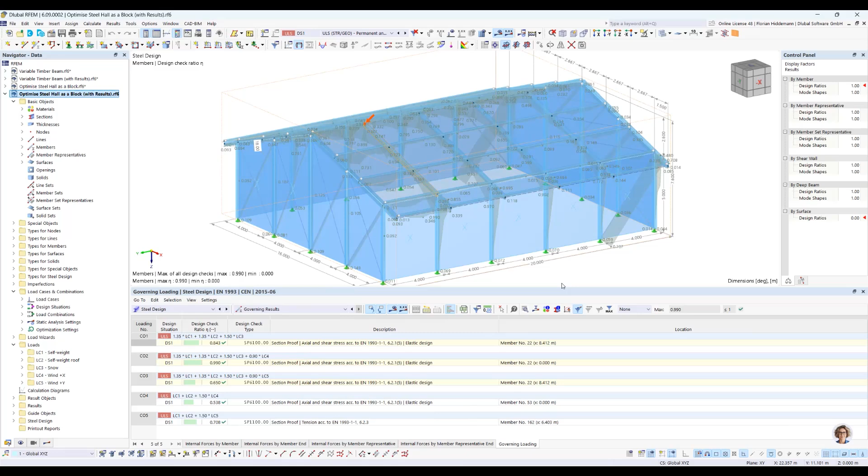And let's have a final overview from steel design. Here, in the block, there are no effective stability designs defined. You can, of course, do it. In the preparation of this webinar, we just didn't do the whole job to add imperfections or stability cases into the members, but you have here a full check of every other thing according to Eurocode 3. And as you can see, the best hall here with nearly 16.9 tons fulfills the design checks, with a maximum usage of 99%.